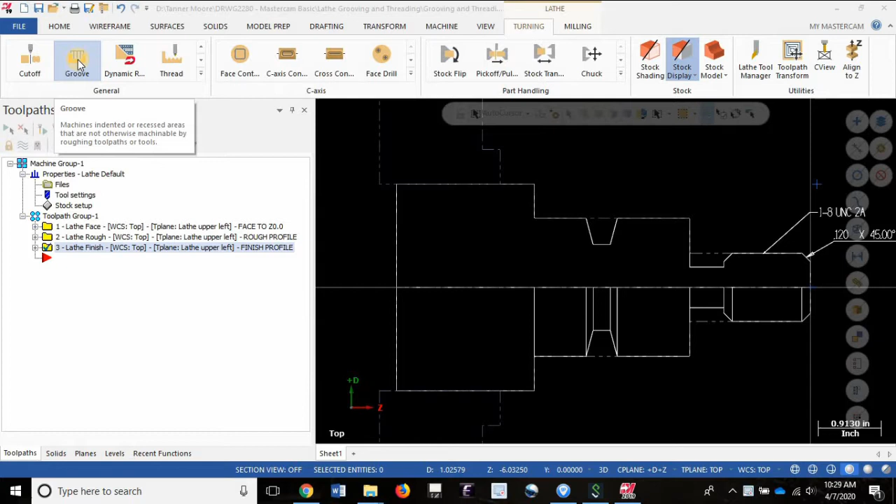So let's get started by selecting grooving. Before we begin selecting any chains, we have an option about how we do that. For the time being, I'm going to recommend going with multiple chains. This allows us to select both of these grooves as part of the same operation, but it provides an efficient tool path between the two.

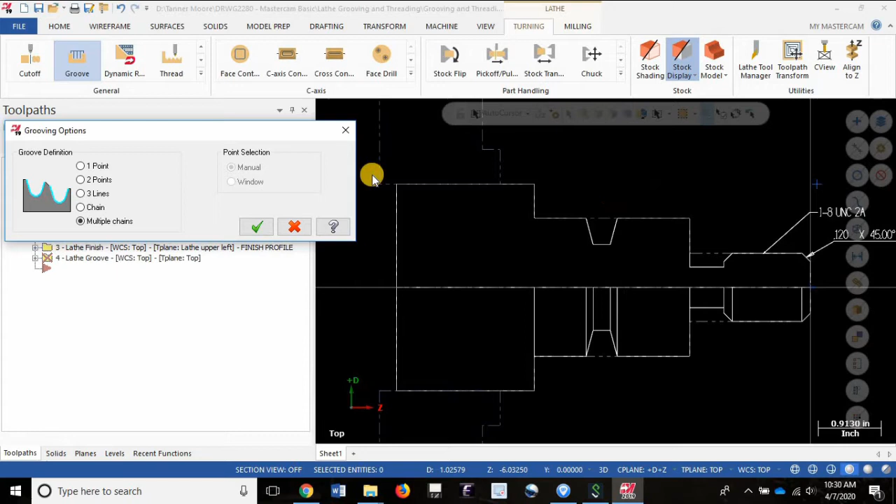It will rough them together, then go back to the first one, finish this one, and finish that one, all part of the same operation. I'll click the check mark, which brings us to our familiar chaining window.

The way we chain a groove is to pick the most extreme wall to the right hand side that's going to be cut as part of this operation. Since we're removing this section of material right here, the gray line indicating the rough stock left over after the finishing operation, in order to remove this material we have to select that bit of geometry. So this is going to be the most extreme wall to the right.

This will be the most extreme wall to the left. And just as usual, we want to be selecting what I refer to as the first half of the line that you're going to be cutting first. So we don't want to pick down here on this line, it's going to be down here, the first half that the tool engages with.

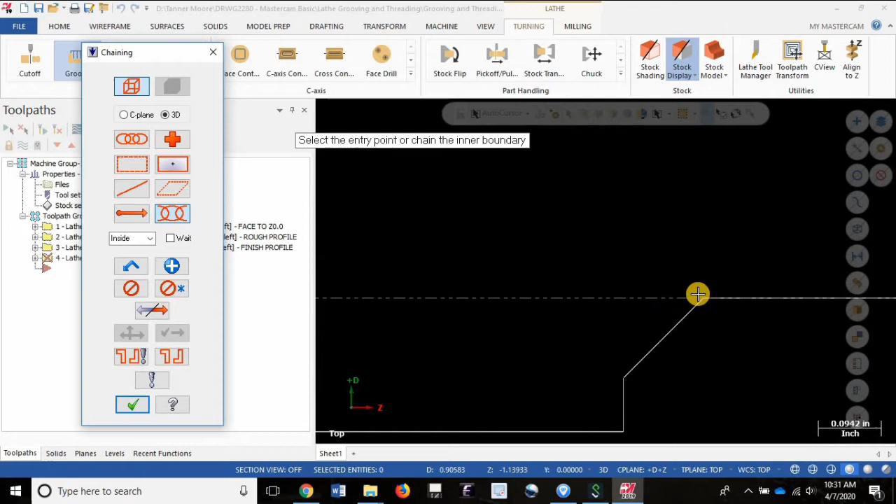So we pick the right line, pick the left line. That completes one chain. We have our green arrow indicating the start, red arrow indicating the end, and the direction of the arrows indicating the direction in which the groove will be formed.

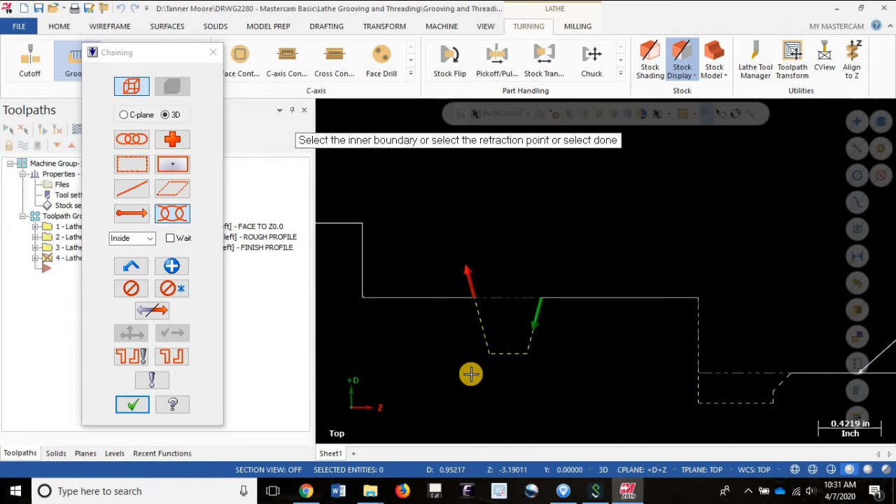Then we're going to go over to this groove right here, select that as well, hit the green check mark, and that brings us into this familiar window.

As usual, I advise that you select a tool from the available menu that most accurately reflects the tool you have available in your shop. This tool right here pretty closely resembles the tool available in the shop I'm working at. Let's select that one and make sure tool 6 is correct, offset 6, station number 6.

Sometimes you get some incongruity between the information right here and the information over here. This is the stuff that counts when you post your program, so do be careful and make sure you have your proper tool number, offset number, and station number over here.

If we go with a feed rate of about 0.0035 inches per revolution, that's been working well with the tool I have in the material I'm cutting, and coincidentally 200 cutting speed has been working well too, so I'll leave that alone and change the finish cutting speed to 200 as well.

If you do forget that, it's not the end of the world, but this will help you get a better surface finish if you control cutting speed. We're going to set a max spindle speed for safety, 2000 RPM. Make sure the coolant is turned on. I'll use force tool change even though I don't need it in this particular case, just a good habit to follow. And let's call this grooving, just to comment it out.

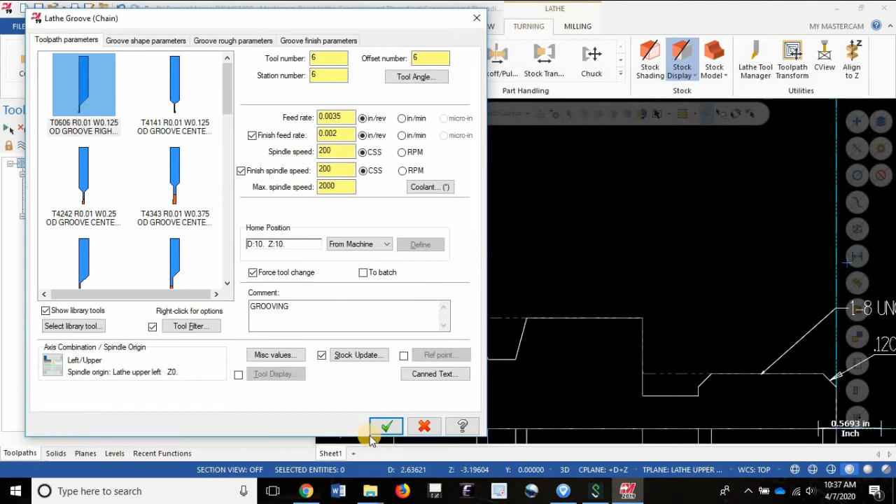Notice there's a pretty detailed list of menus here that I'm not going to get into just yet. I'm just going to hit check mark after setting the tool cut parameters and see what happens.

Okay, so we have some good looking tool paths. We don't have a tool crash. Everything's looking pretty good, all the material has been removed. You can see the gray and white lines are overlapping, meaning your rough geometry is aligned with your finished geometry. But we have a couple of problems here. This isn't ready just yet.

One concern we have is the width of the insert that's going to be cutting this groove. We need to make sure that in this tool information it matches what we actually have in our shop. You can access this two ways.

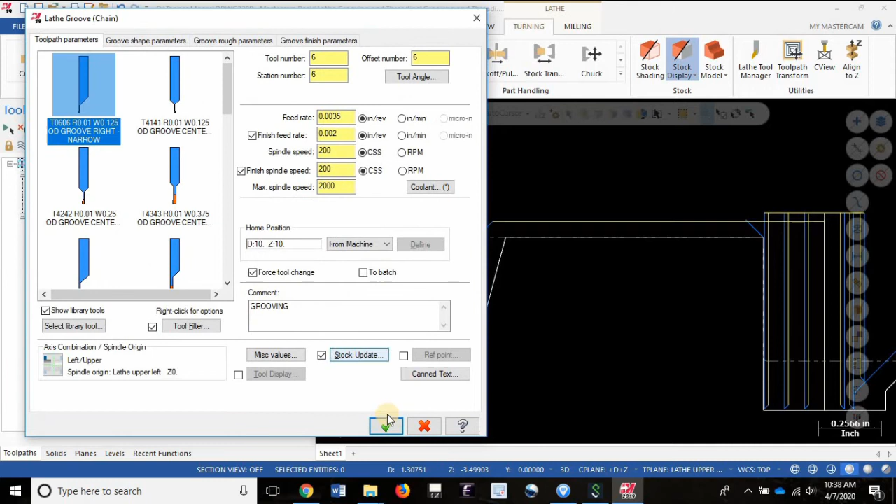One is through the parameter window. You can right click on the tool and say edit tool, or you can select the tool information right from this menu right here. You can see it's available for all of your other tools: roughing, finishing, grooving. So I'm just going to select right there.

This information is what we need to concern ourselves with. These are the bits of geometry that describe the insert we're using. A is the insert width at the point where it's inside the body, E is the overall length, D is your cutting width, and this is the one we're worried about right here.

If you're in doubt about whether it's D or A being the cutting width, D is wider than A, which means it provides clearance for the rest of the tool as it enters the workpiece. So D, the widest point of the insert, is your cutting width, and right here it says we have a width of 0.125.

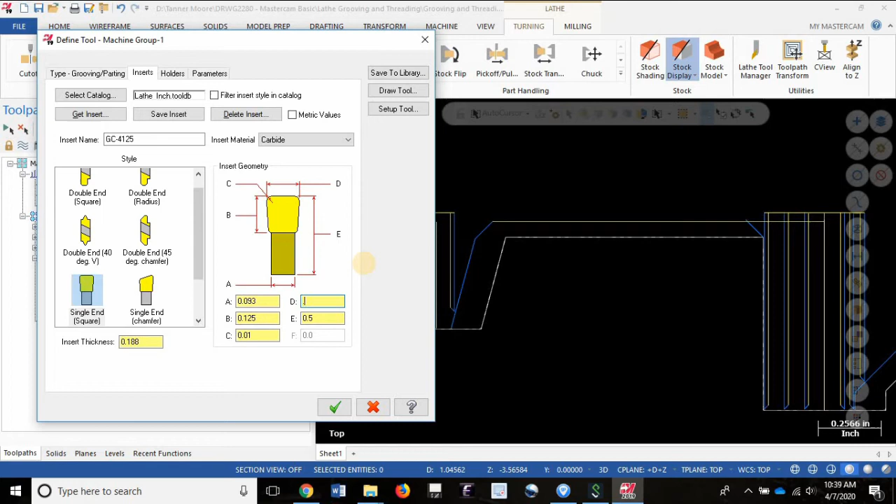Now the shop I'm working at has 4 millimeter, or 0.1575 if converted to imperial, and that will impact the operation. So it says here, changing this tool will update your operations. Continue, and yes, we want to continue.

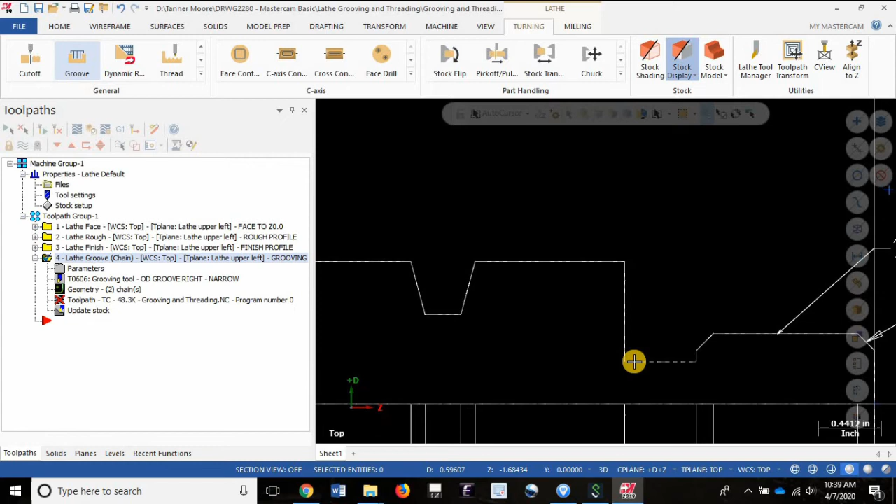So if you have a half inch wide groove, it takes more cuts for a narrower insert to create that same size of groove. But with a larger insert, you can cut the same groove with fewer passes. So let's take a look in Backplot to see what that looks like.

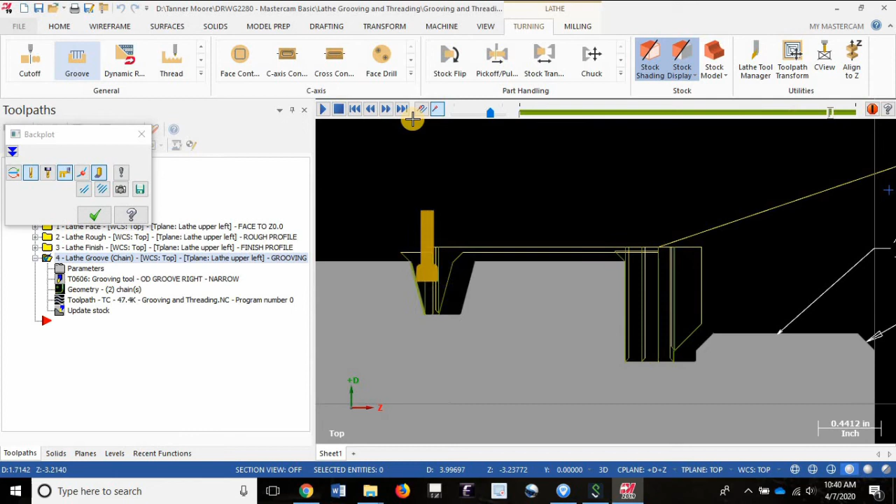That looks pretty good. Again, no crash. We are accurately reflecting the width of the insert. If we go back into the parameters, we can see right here 0.1575 has been updated from 0.125.

So then you might be asking, well, what other things might we need to control in these parameter windows if this appeared to be pretty good at a glance in the work menu? And to be honest with you, you can get away with changing very little as far as the groove goes.

In order to achieve an appropriate groove width, that must be controlled by the width of the insert right here. If you have this width incorrect, you'll never get your groove width correct on your program. You'll have a lot of difficulty at the very least to try to accomplish that. So in order to achieve size dimensions or width dimensions, that's achieved right here, and there's no cutter compensation or anything to adjust for that.

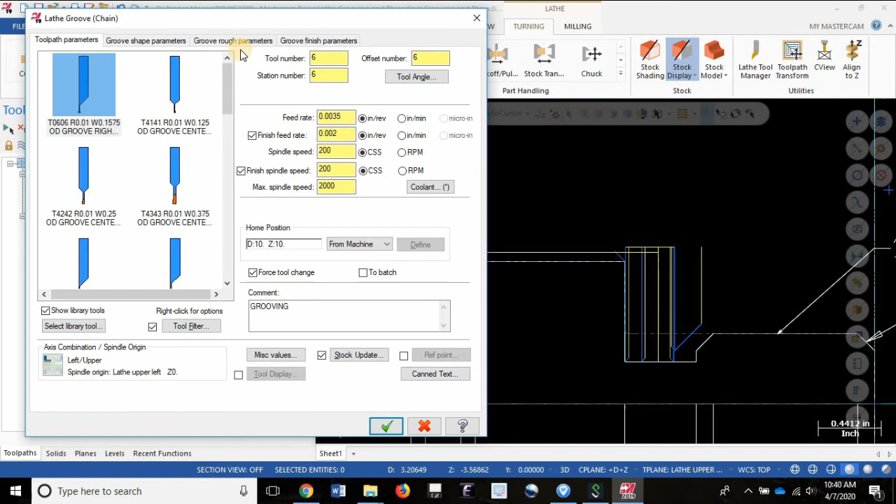The only thing you might want to adjust when you're machining your workpiece is the diameter or the geometry of something like a V-groove, where your feed is a blend between X and Z simultaneously. In that case, you can go back to your parameters, go to the finish parameters, make sure wear is turned on, and otherwise the default settings for grooving operations in Mastercam typically work very well on their default settings.

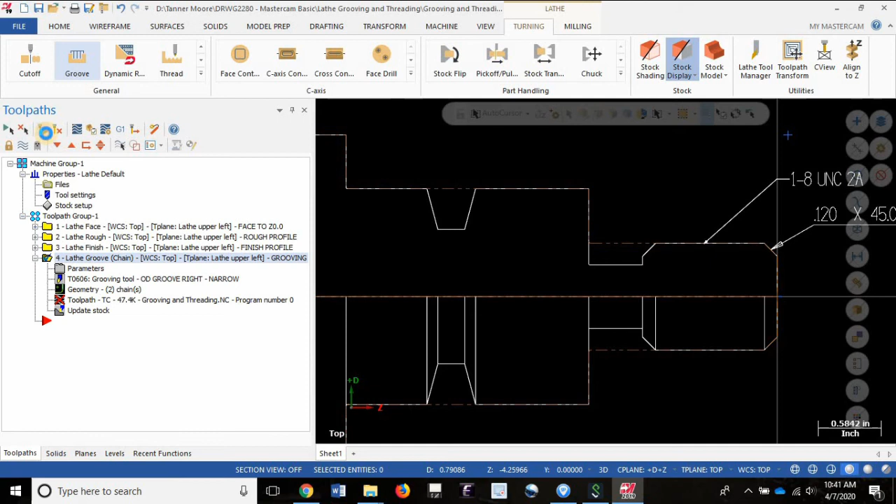If you want to leave a little bit more or less material in X and Z for finishing, you can do that right here. But generally speaking, when I'm doing grooving in Mastercam, I leave the vast majority of default settings alone.

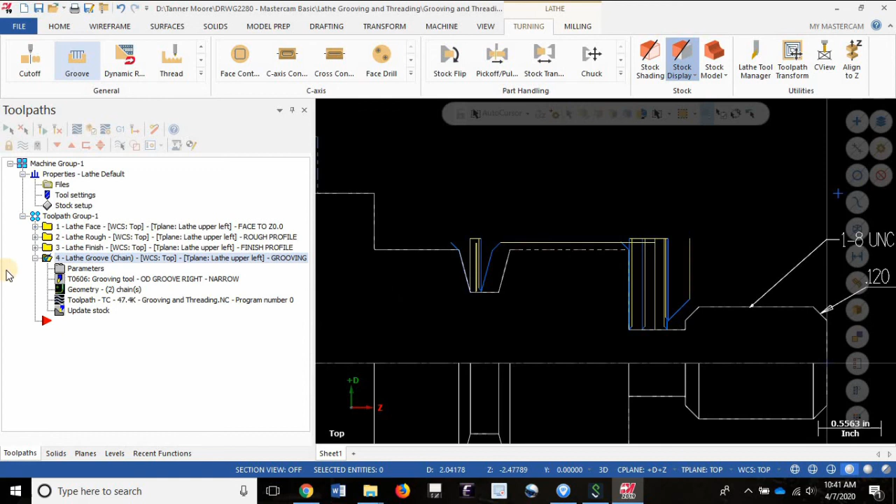So I encourage you to experiment with things like leading in and leading out, different groove shape parameters. You can pick the angle with which the tool maneuvers through the workpiece. Maybe that will change depending on if you have a round groove or a larger V groove. There are many reasons why you can change the parameters for your groove in Mastercam.

As usual, I recommend changing only one parameter at a time. Observe the difference, see what it gets you, and you can do a lot of experimenting before you actually run your program on the machine, paying close attention to the changes you're making in the parameter window.